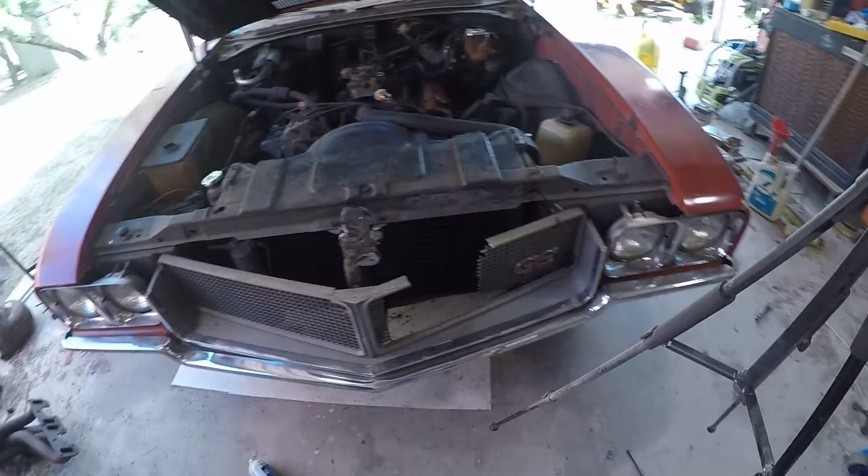First thing we're going to be doing is testing the alternator that's on there. The generator light is on, but I haven't actually put a meter on it yet. So that's what we're about to do, where we are going to be testing our alternator and see what the heck is going on.

And the old digital meter, put black to red because, yeah, people are weirdos. That's on. Bad, Jason. Okay. So battery's sitting on 12.3 volts. Let's see if we got anything going on back over to here. Yeah, so we got voltage going to there. So there's nothing wrong with the wiring in between here and there. Let's crank her up and see what happens.

So yeah, no charge, alternator is done now. But again, the engine I got over here happens to have another alternator on there. I don't know if it's exactly the same. Doesn't look quite exactly the same, but I think I can retrofit it and make it work. All the connection points are the same. Looks like the only difference is right here, which, yeah, I should be able to make that work.

So, I guess we're gonna go right on ahead and pop that guy off. I need to grab some tools and head to work. Okie dokie. Come in here. There ain't a metric to be seen on this car. Whew.

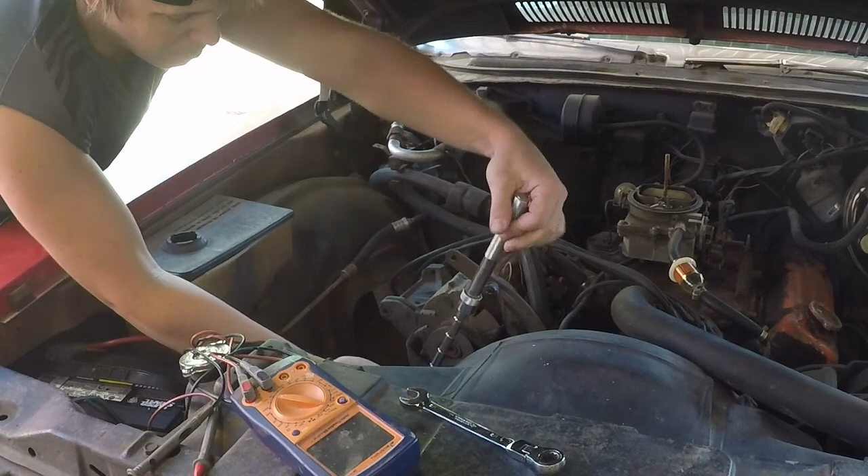I think we're out. It's just kind of stuck. So we're gonna come over here and get this giant screwdriver. This is Big Mo. Big Mo's been in my family since before I was born. Seen a lot of old cars. Been beat up a little bit, but that's okay. The owner of this screwdriver is a little bit beat up too.

I'm sure everybody has one of these, so you just want to get in there and give it a good fight on the bolt. It should start popping right on out of there. Get our OSHA approved hammer here. Give the old push and twist combo. And the jiggle jiggle slide. There we go. Off from there.

Yeah, don't tell me I gotta take that upper piece off too. Don't tell me that. They're telling me that. Maybe if I take the old Big Mo. There we go. And of course it ain't gonna be easy.

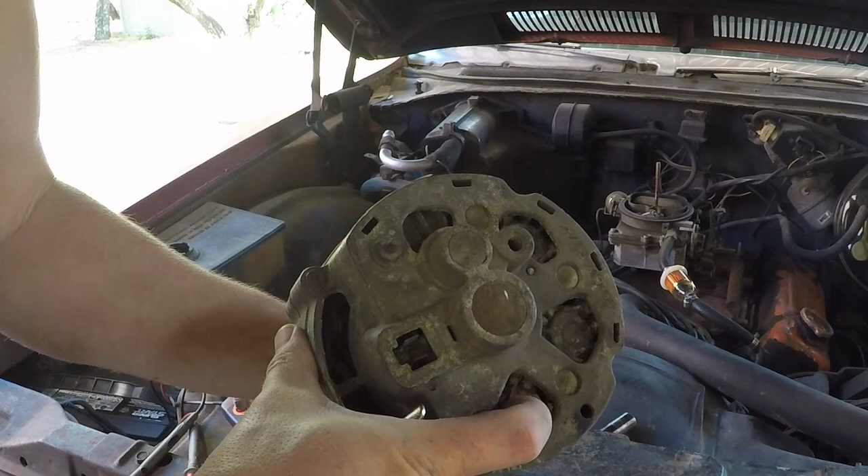Yeah, that's an old Delco Remy with some pretty good leaves and rat's nest stuff looking up in there, so that's probably what happened to the old girl.

Okay, so now that guy's off, I think I'm gonna go ahead and start unbolting this intake over here, or maybe the one on the other side first. Yeah, I think that's what I'm gonna be doing. All right, fellas, so got this intake loose right here. Got the old one, or the new one, off from the new motor over there.

Now there's something I gotta have a little bit of a confession here on. You see, I live in constant fear that YouTube is gonna demonetize me for firearms content because of these guns that I pack, all right?

Now I want you to appreciate just how freaking heavy this intake is as you watch me struggle to lift it out of here. All right, here we go. Everything's loose. Everything's out of the way. All right. That is no joke. I think that intake weighs about 90 pounds.

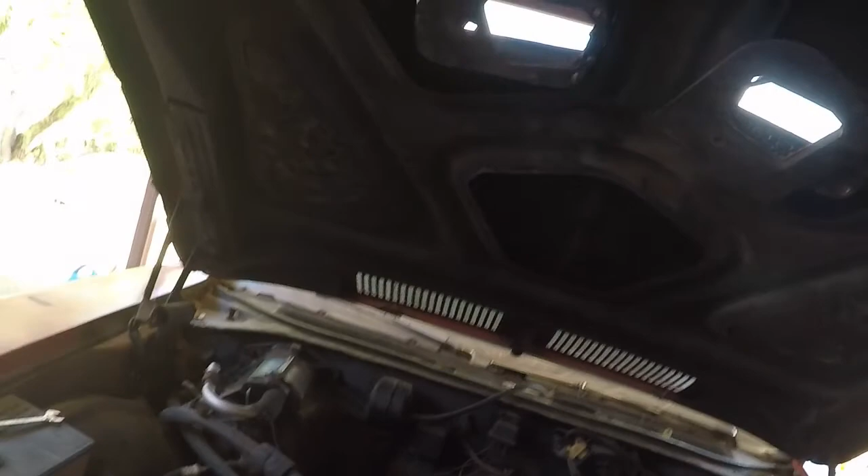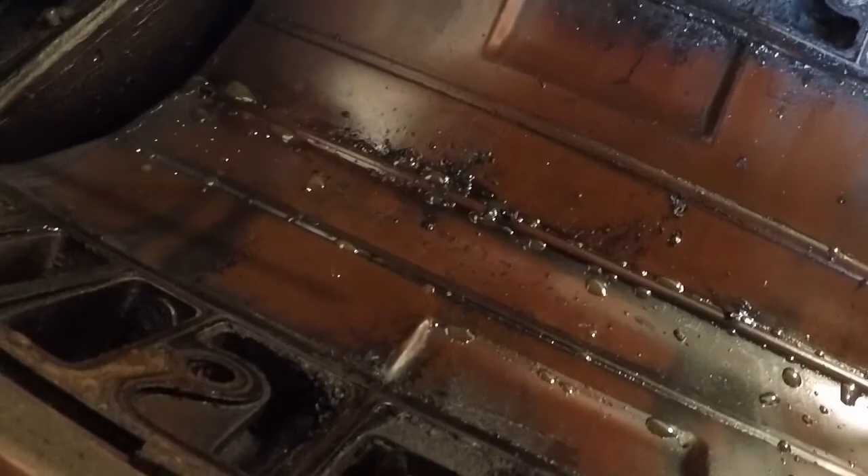Okay. So let's take a little peek down here in the intake valley, which these Buicks are a little weird because the pan gasket and the intake gasket are basically the same thing. It's pretty much just solid metal straight across the board. So yeah, we're gonna come in here, we're gonna clean this up with the old brake clean and whatnot, and then we're gonna slap our new 4-barrel intake on here, carburetor and all.

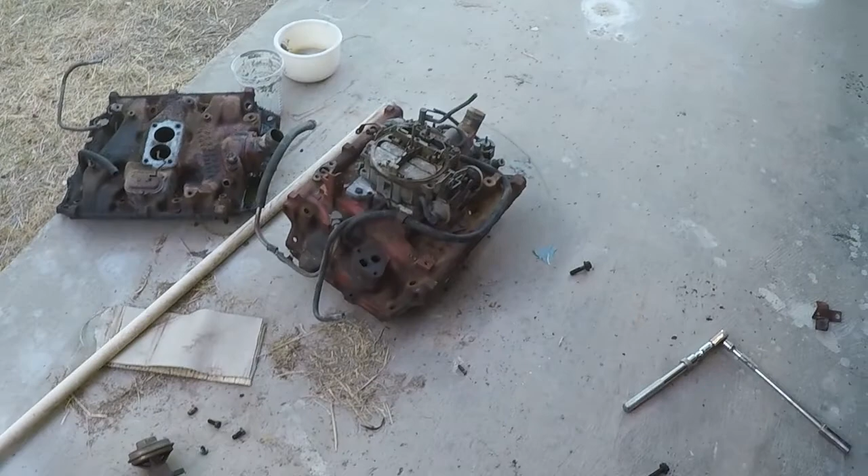And the good news about this particular engine is that's a rebuilt alternator, that's a rebuilt AC compressor, that's a fairly new cap, spark plug wires and everything else, and that's a Rochester Quadrajet. Now I am going to go out on a limb here and say that this was a running car that this motor came out of.

So I am so confident I'm not even going to pull that carburetor off. I'm just going to slap it on and run it as is where it is. Might bite me, might not. But I'm going to go get some water because I'm about dying after that monster workout. And then I'm going to clean that up and slap the new intake on and we'll see what happens.

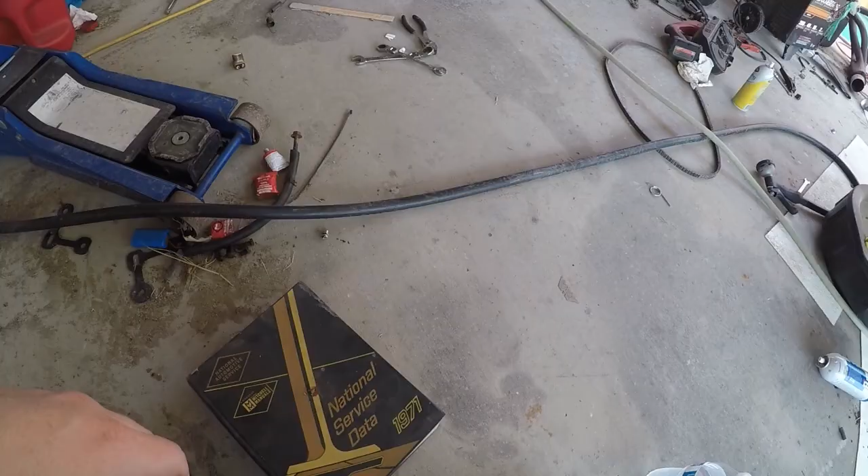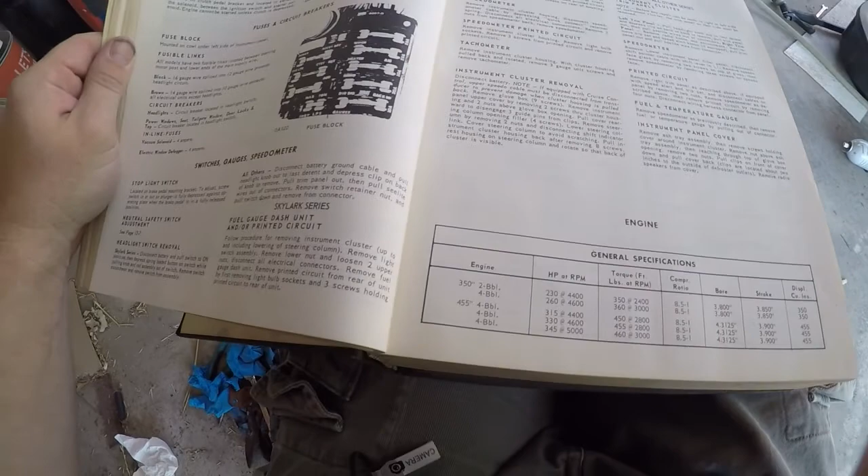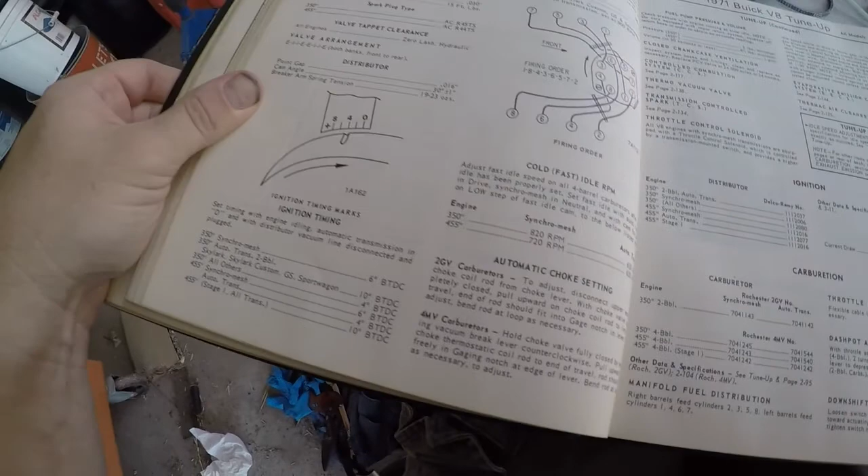Alright, so for torquing the intake down, we have to go back to our 1970s version of the internet and come in here. This is tune-up and specs on pretty much everything. It's a 71 model, but it's the exact same stuff. So it's got a Buick 6 tune-up, Buick V8 tune-up. So we got all kinds of cool information in here, timing marks and valve arrangements,

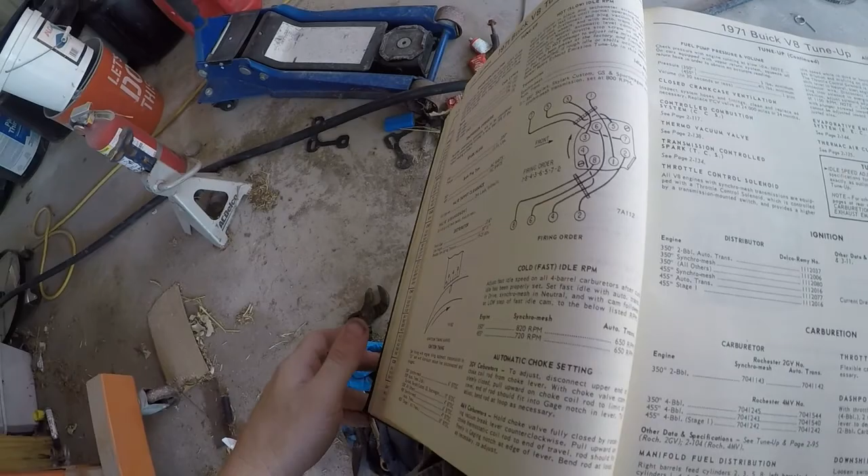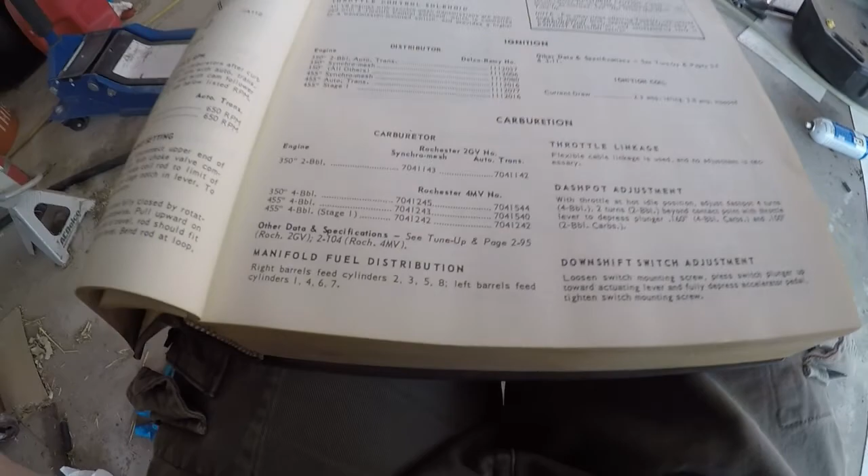engine identification, which I honestly probably need to publish a lot of this stuff on the internet because you can't find a whole lot on the particular ones. So we got the Rochester carburetors, model numbers, fuel distribution, all kinds of stuff. But yeah, this was your ALLDATA back in the day. This is what professional mechanics see, fuses and circuit breakers and all that.

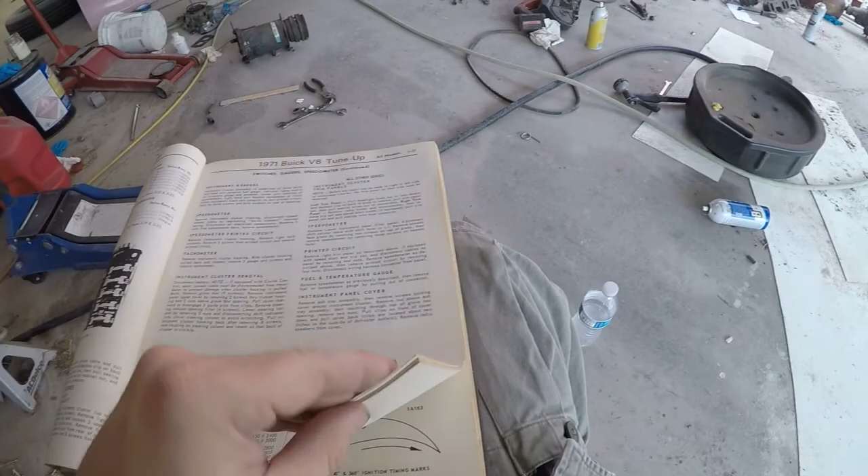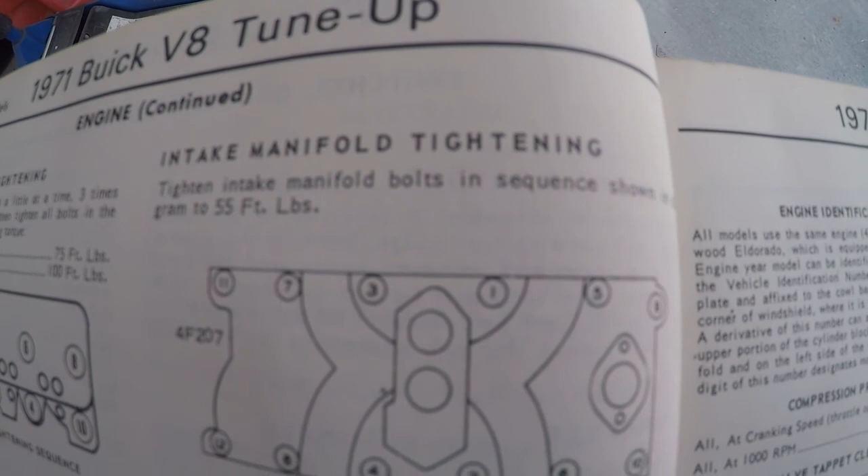But what we're looking for right now is intake manifold tightening sequence. So front of the engine, and it goes 1, 2, 3, 4. Just basic crossing pattern and 55 foot-pounds of torque. And we will go through there and take care of all that. It's pretty boring to watch me torque stuff down, so I'll do that real quick and I'll show you the finished product. So herein lies our finished product.

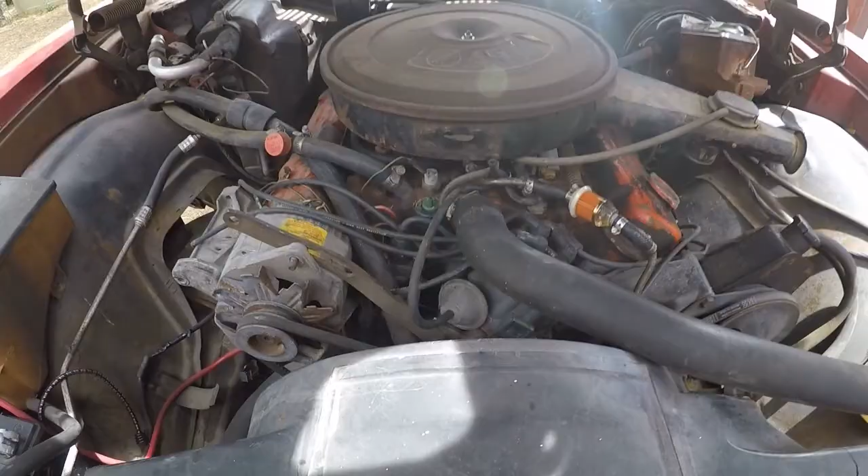We got our fake 455 air cleaner on there and all that. Didn't bother painting the engine. It would have prettied it up, but honestly, if I want to do all that, I need to pull the engine out and degrease it and shoot everything, put a cam in and make it wild and all that stuff. Got a new alternator on while I was at it and it's charging properly now. But anyway, let's come over here and crank her up and see what's what.

Oh my God, it's hot. Whew. Bet you hell ain't a mile from here.

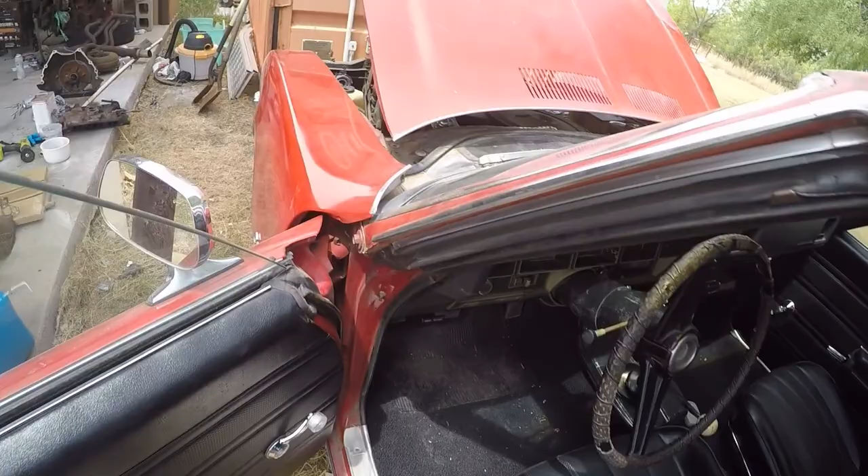Okay. So, give it a little pump. So, fires right up in neutral. As you can hear, she sounds a whole lot healthier. Got some of that 70s muscle sound going to her now. Runs a lot smoother up here, but I've already run her down the road once and she's got a lot more power now. The carburetor and 4-barrel all open up like it should.

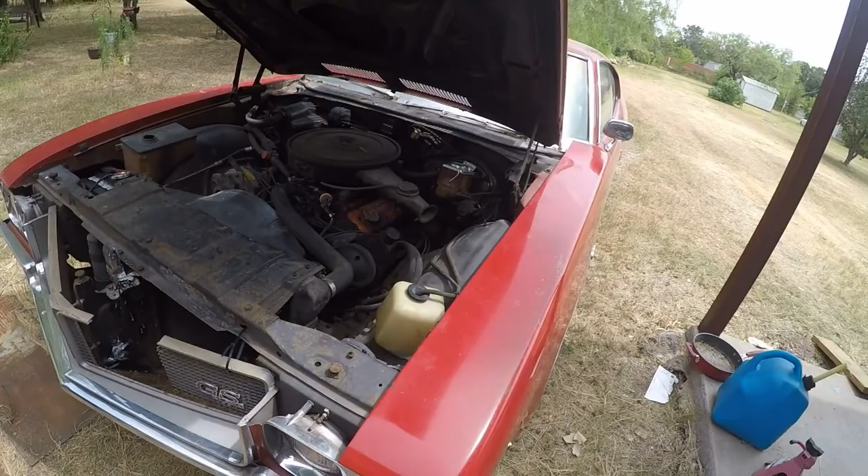And get her stopped. So now we got her running right. We can focus on other stuff like speedometer not working, AC not working, radio not working, and everything else that ain't working on this car. And once we get that done, we can move on to the rust repair and grill repair and all that stuff. Basically, there's a lot of work on this car to be done, but we'll get to it and we'll have a lot of fun with this car. So yeah, that's pretty much the end of this video.